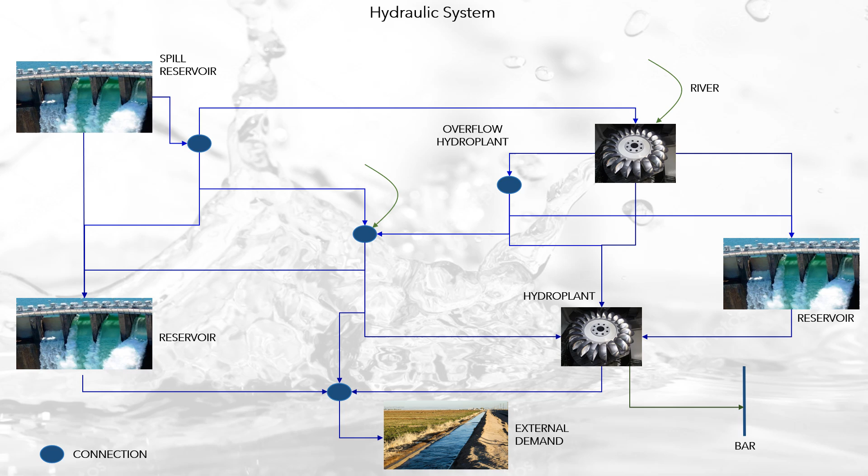Hydro system physical modeling. HAI-Water corresponds to a general model that includes all kinds of hydraulic components: reservoirs, hydroelectric power plants, rivers, overflow channels, connection points and pumping stations, demands like irrigation, aqueducts, environmental, industrial. Components can be freely linked to form any topology, like pumping storage systems.

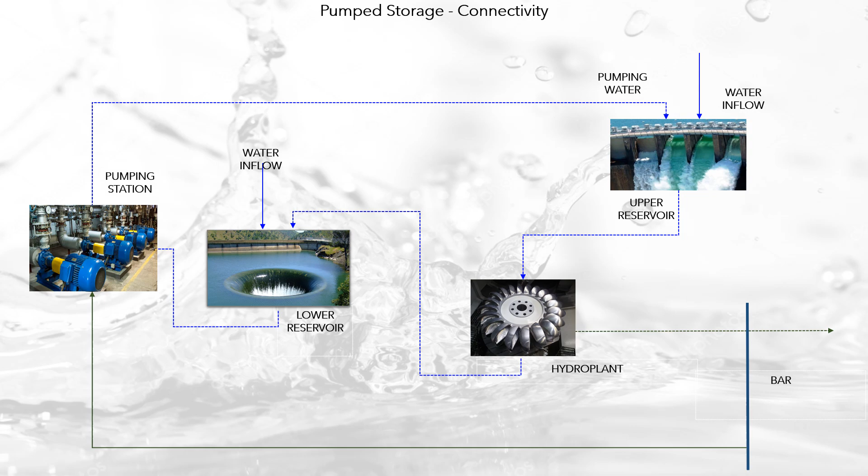Hydroelectric power plants are modeled independently of reservoirs, so plant-reservoir connectivity must be established. The regulation capacity of the reservoir is simulated in detail, so the simulation consistently represents the dispatch of the power plants, considering their ability to regulate the multi-annual, annual, and hourly water resource.

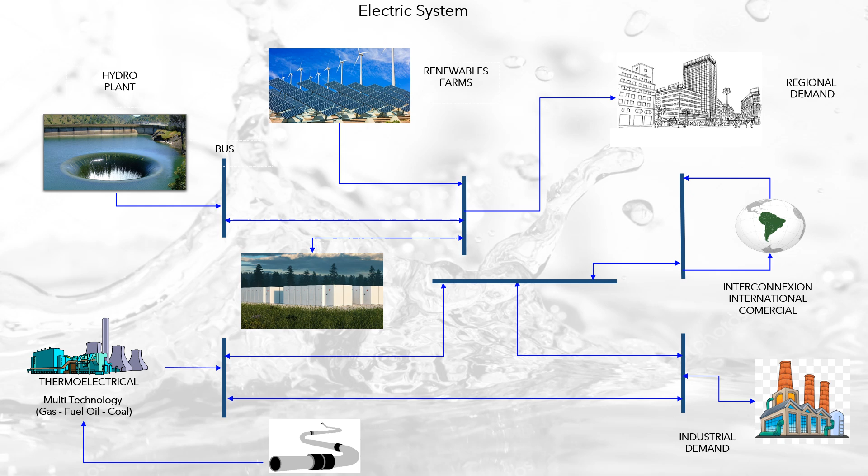Electric system physical modeling. Electrical connectivity is carried out through a network of circuits and bars that integrates different types of installations: power plants like hydroelectric, thermoelectric, coal, wind, solar, biomass; places of demand like industrial, cities; regional interconnections and energy storages. HAI-Power includes the simulation of several types of renewable energy sources and energy storages. For each type of electrical asset, HAI-Power includes the exact equations for simulation.

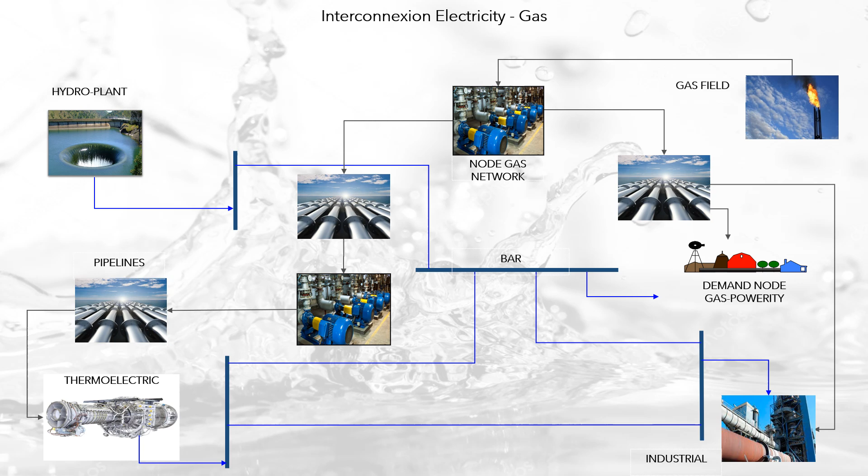Natural gas system physical modeling. HAI-Gas describes the process of supply and demand of natural gas. From this point of view, its integration with the electricity system determines the economic equilibrium of electricity-gas markets. The entities of the natural gas system are: nodes, which connect the gas system installations. Production fields. Consumption zones, discriminated by sector, for example refineries, heavy industries, residential, vehicular, commercial, and thermoelectric power plants.

Transport systems: I, pipelines, and II, multimodal transport systems using vehicles; pumping stations, which compress the gas to transport it; and ports, which receive and ship liquefied natural gas, LNG, and have gas storage capacity. Connectivity between the electricity and gas sectors occurs through the demand for natural gas for use in thermal plants, and the substitution of demand that can occur between gas and electricity.

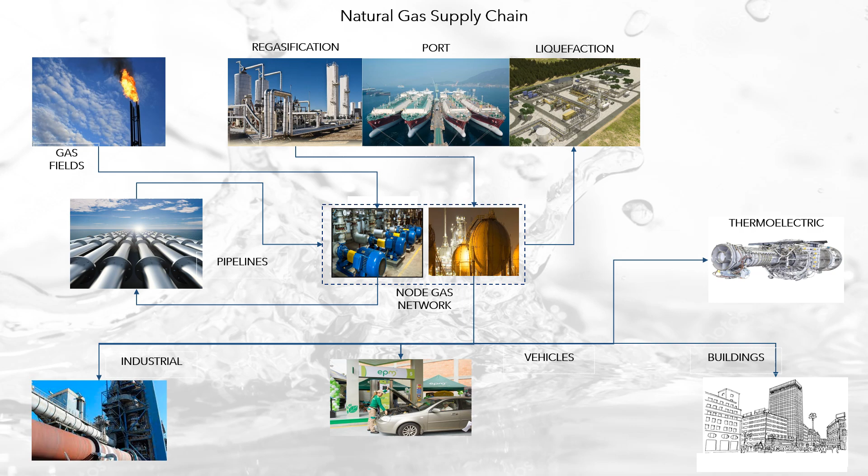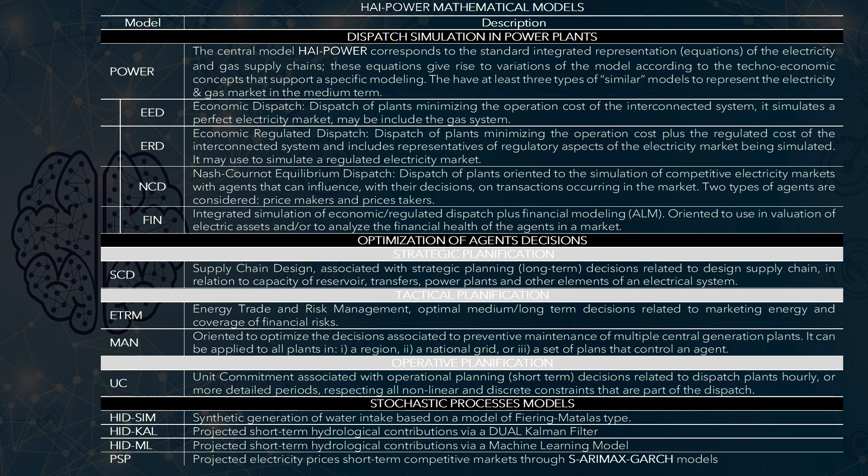Electricity system and wholesale market mathematical models make up a flexible decision support system that provides different types of services in an integral way. They can be classified into integrated dispatch of generation plants, optimization of generating agents, and predictive analytics of stochastic processes.

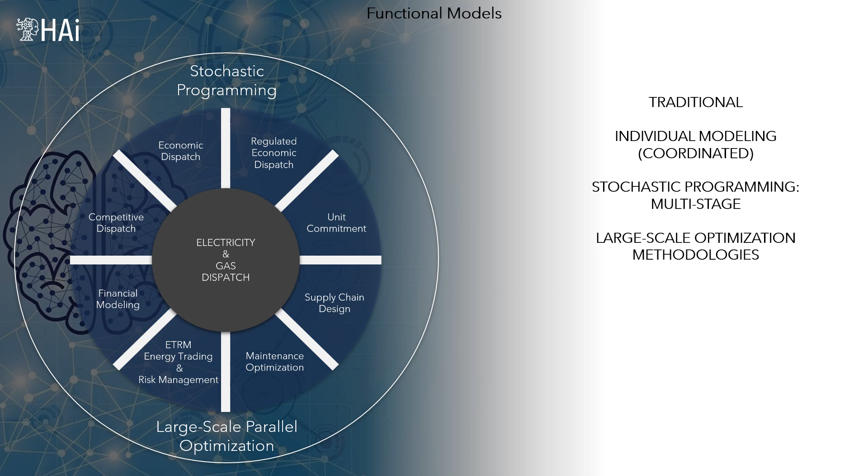Traditionally, the optimization models in the electricity sector consider individual modeling with exogenous coordination between models, based on multi-stage stochastic programming, and using large-scale optimization methodologies. The differences with the state-of-the-art modeling provided by HiPower are integrated holistic modeling, scientific risk modeling, multidimensional uncertainty, parallel optimization, and autonomous real-time distributed optimization.

Three types of connectivity of the generation system and the transmission power grid are considered. Ideal single node: ideal dispatch ignoring the transmission system. Electric transmission network connectivity: based on the detailed connectivity of the electricity transmission system using bars and circuits.

Operative areas connectivity: when the user does not have, or does not want to use, the detailed configuration of the electricity transmission grid, it is possible to use the connectivity based on operational areas, including limits on the transfers between areas.

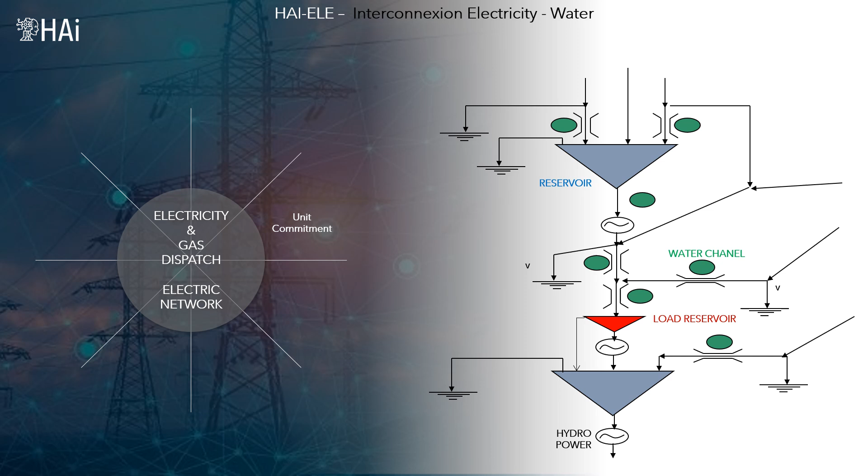Interconnection electricity-gas integrates the electricity network with the natural gas network. Interconnection of electricity and water can be fully detailed, including travel times between nodes and transport restrictions in water resource conduction channels. The central model of HiPower is the standard representation of the electricity and gas supply chains.

These equations give rise to variations of the model according to the techno-economic concepts that support a specific modeling. There are at least 4 types of economic models to represent the electricity and gas market: economic perfect dispatch, EED; economic regulated dispatch, ERD; Nash-Cournot equilibrium dispatch, NCD; and unit commitment, UC.

The EED is the core model of HiPower, as its equations and constraints are used in multiple specific models that the agent requires to address decision support needs. The EED and the UC models optimize the dispatch of generation infrastructure, minimizing the cost of operating the electricity system, which simulates a perfect electricity market. The differences between these two models are the detail of modeling. EED is oriented to planning and UC to real dispatch.

Economic regulated dispatch: dispatch of plants that minimizes the cost of operation of the interconnected system and includes representative aspects of the regulation of the electricity market being simulated. It does not correspond to a model of economic equilibrium; however, it is an easy and fast way to represent regulatory considerations based on optimization models.

Nash-Cournot equilibrium: dispatch of plants oriented to the simulation of competitive electricity markets with agents that can influence with their decisions the transactions occurring in the market. It can be used, among others, to project the dispatch of a competitive market and study the exercise of dominant market power of agents.

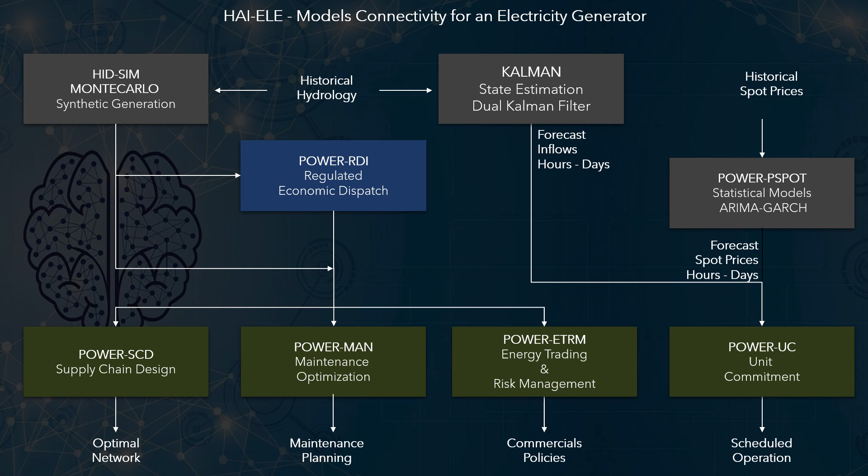4 models are considered fundamental to support the strategic, tactical and operational decisions of an agent that operates generation plants. The diagram presents the design of an integrated set of mathematical models to support the decision-making of a generator agent. Electricity dispatch and financial analysis: integration of dispatch models with assets liabilities management, ALM, financial models including risk management, to perform analysis of the financial impact of decisions.

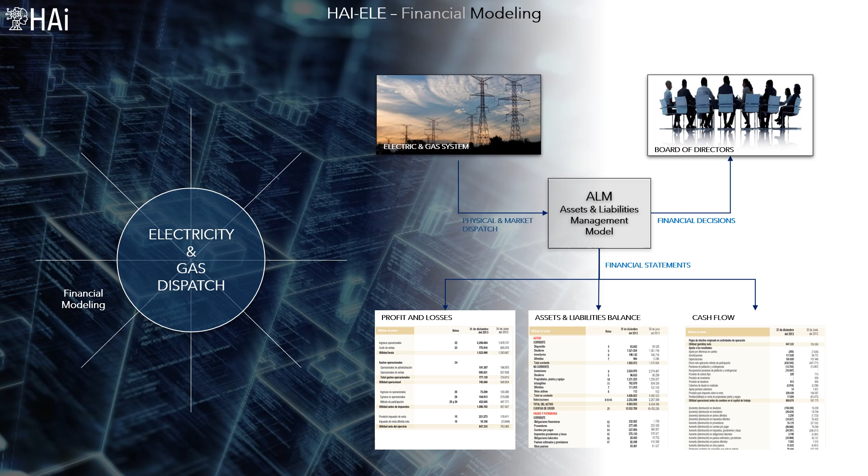The main applications are the valuation of income and expenses of investment projects and energy installations, valuation of energy companies, and integrated optimization of investments by global energy companies, taking as a reference the regulatory laws of the different regions or countries. The financial modeling results individualize the operating income and expenses, and can include all types of legal accounts.

Electricity supply chain design and risk management: associated with strategic planning decisions related to resilient design of the supply chain, in relation to capacity of reservoirs, transfers, power plants and other assets of an electrical system. It may include risk management and financial planning.

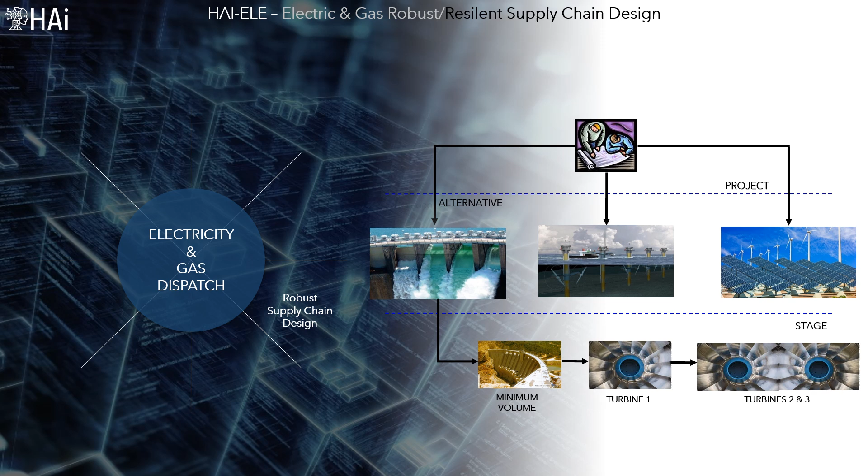Energy trading and risk management: optimal decisions related to trading energy and coverage of financial risks based on standardized or non-standardized bilateral contracts. It corresponds to a set of mathematical models aimed at supporting the decisions of the different agents involved in energy trading in the long-term market, spot market, and secondary markets.

The result of a risk analysis is the definition of Pareto curves of risk versus expected revenue, based on which the decision maker must define the risk position he wishes to assume, varying between risk-prone and risk-averse.

Maintenance optimization is oriented to policy making for preventive maintenance of multiple generation plants and other electrical assets. It can be applied to all assets in a regional or national grid. HiPower MAN can be implemented following the principles of PHM, Prognostics Health Management, for industrial asset maintenance, integrating specific models of predictive analytics for asset components and prescriptive analytics to optimize the integrated operation of the asset network.

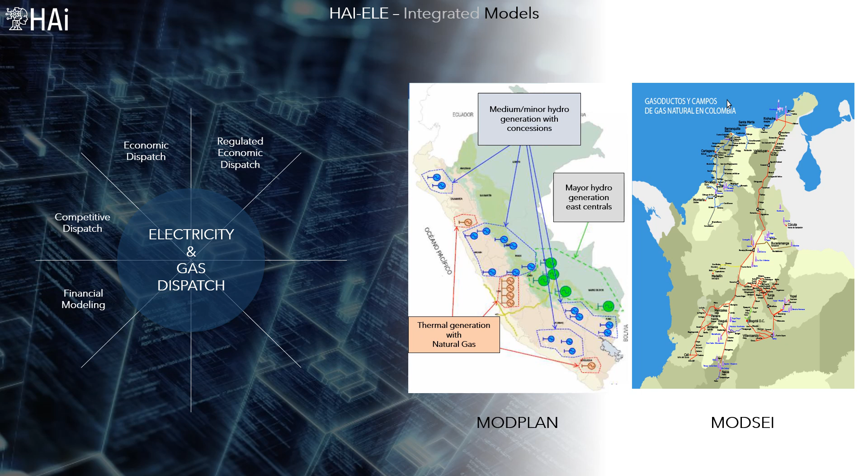HiPower has been used by the ISO in Peru, and the Market Supervisor in Colombia, for planning and decision-making purposes. HiPower includes some predictive analytics models. Spot price modeling.

The prediction of spot prices of the energy market is fundamental for the decisions made by an agent that participates in that market, whether buyer or seller, generator, trader, or distributor of energy. This is because the decision maker requires that the model's results that produce spot prices be used in other mathematical

prescriptive models. The mathematical models to be used depend on the planning period, short, medium or long term, and the type of market considering the dispatch of the plants, by mathematical model, or by market agents offers in a free market. In free markets the situation is complex since the law of price formation cannot always be explained based on mathematical rules, explicit, clear and universal, that may integrate a mathematical model.

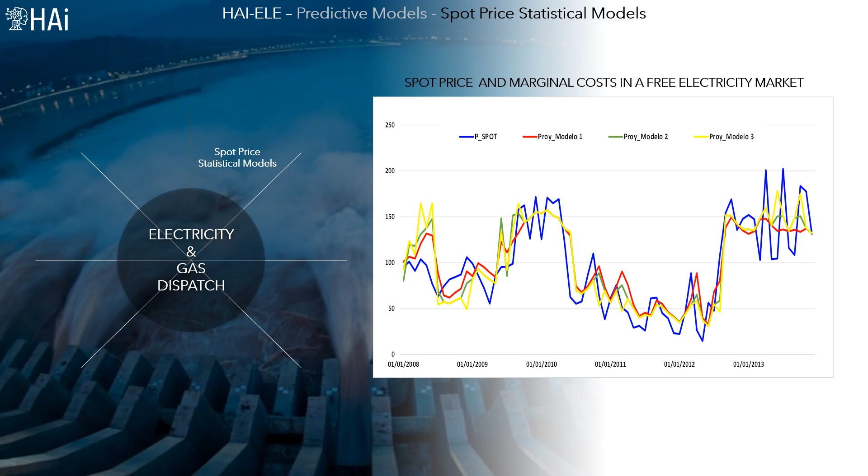Synthetic generation renewable energy sources. For the generation of synthetic scenarios of climate variables, there are two requirements: short-term, hours, days, and medium/long-term, weeks, months. Specific short-term models must be built for each renewable source. For the medium and long-term, there are three alternatives to generate synthetic scenarios.

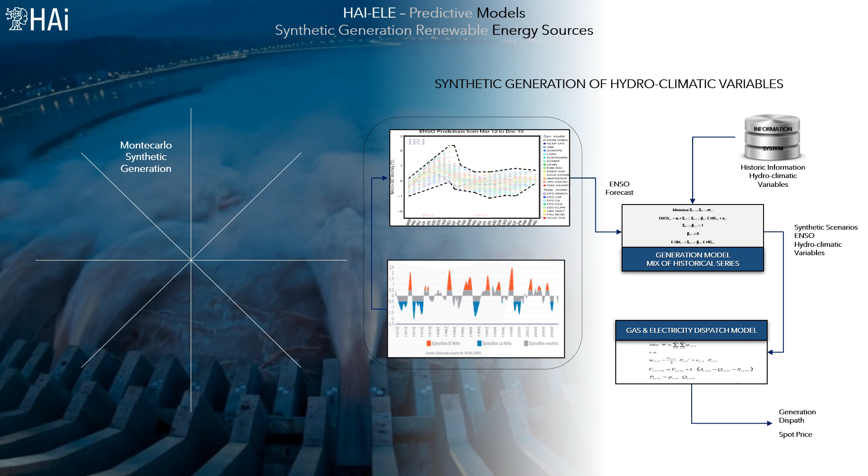Smart grids optimization models. In a regulated environment, generation, transmission, and distribution are operated by a vertically integrated enterprise, usually a state-owned, which has a monopoly on the supply of electricity. Conversely, in a deregulated environment, different parts of the electricity grid are owned and operated by different actors, and electricity markets provide a platform that fosters competition among participants.

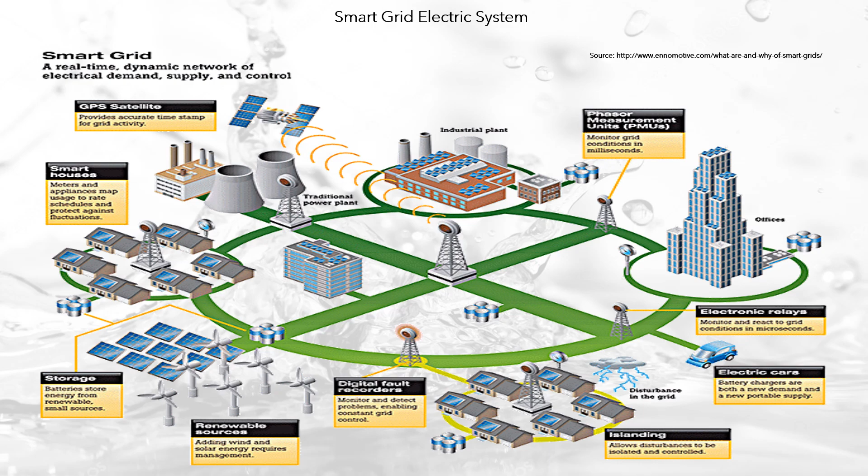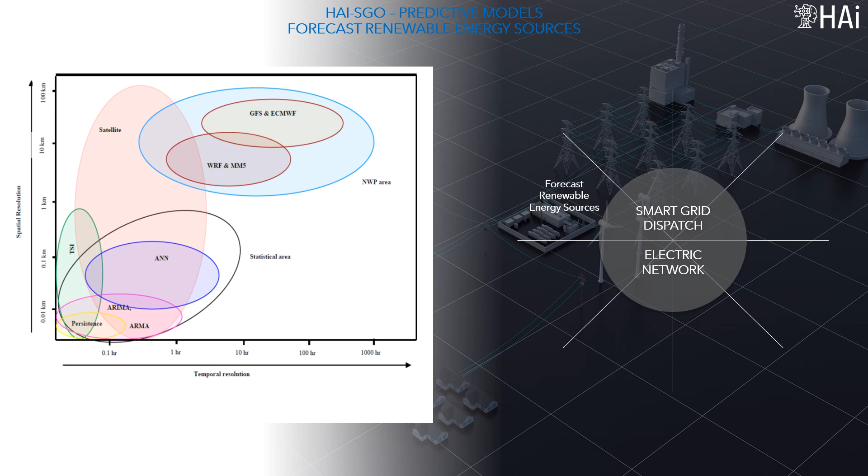As each smart grid is, it requires a specific decision support system that allows the operator to interact with the entire electrical system. HAI-SGO provides all the analytical elements necessary to configure the specific DSS that each case requires. Forecast renewable energy sources. They correspond to predictive analytics models focused on the prediction in the specific sites where the generation plants are located. Forecast of demand energy. Demand projections per years, months, weeks, days, hours.

HAI-SGO is integrated by the following optimization models. Economic dispatch of the smart grid, optimization of the management of electrical energy in small cities, factories, universities, shopping centers, office buildings, urbanizations. Smart grid unit commitment, optimization of the dispatch of the electrical load in real time, or in the short term. Smart grid configuration, optimizing the network topology.

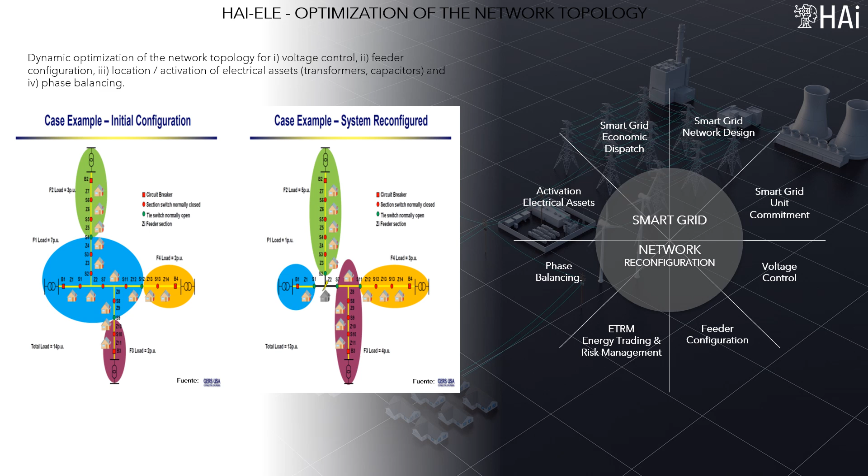It considers voltage control, configuration of feeders, location or activation or reallocation of electrical assets, like transformers, capacitors, and phase balancing. Smart grid design, optimization of the design or redesign of smart grids with modern power technologies. ETRM, energy trading and risk management, decisions to buy and or sell electricity, in a long, medium and short-term market, one day in advance or the day of dispatch.

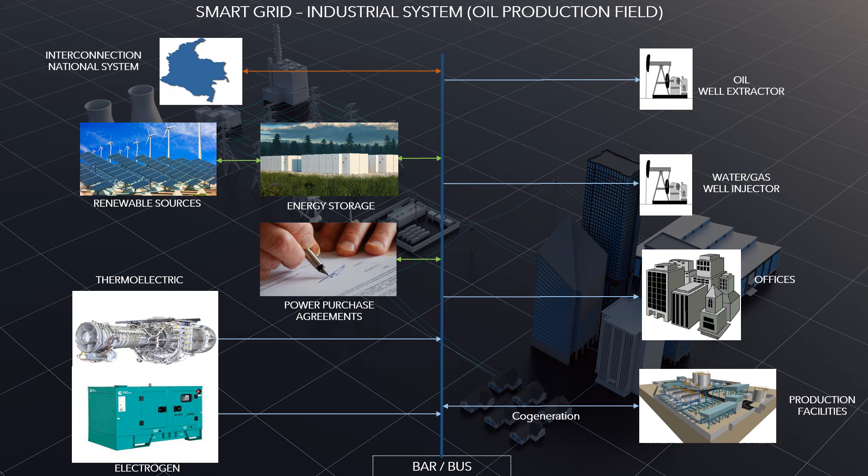Industrial energy efficiency. The technical economic viability of energy storage coupled with the proliferation of energy technologies based on renewable energy sources has changed the landscape of the industrial sector, since it is now possible, and increasingly efficient, to generate renewable energy and store it for use in due time. In practice, all industrial companies can be agents that interact in the electricity market, acting as co-generators and carry out commercial activities and transactions. This, together with the industrial Internet of Things, increases the pathways to achieve industrial energy efficiency.

Industrial energy efficiency results from the integration of production processes, transformation of matter, with industrial energy services, energy transformation, aimed at the simultaneous optimization of both industrial production and energy conversion that is related to polluting emissions of gases and liquids, associated with increasingly demanding environmental control laws.

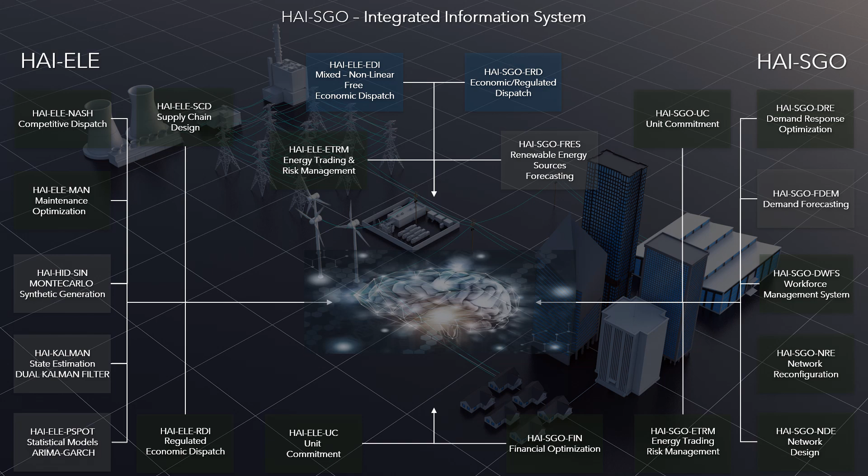The HAI-ELE and HAI-SGO models can be integrated with complex industrial process models, in which it is necessary to redesign the power supply system according to the new power technologies. This type of model includes the simulation of polluting processes, for example, combustion in furnaces, to determine the optimal mixture of fuels in accordance with environmental regulations. HAI-ELE and HAI-SGO integrate the models and information systems around a common data model.